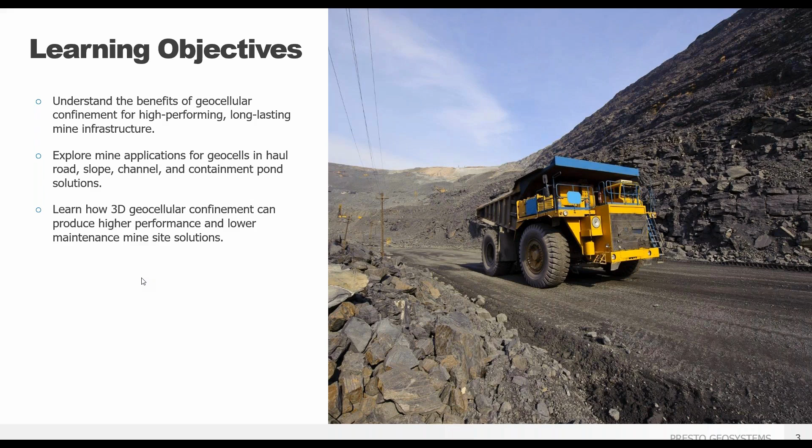The 3D GeoWeb cellular confinement system is perfect for mine industry solutions as it stabilizes unstable soils vertically and horizontally in the applications of load support, slope protection, channel armoring, and earth retention. Today's presentation will focus on permanent and economical solutions with the GeoWeb system for a number of challenges facing the mining industry.

Stabilization of soft soils for access to site and haul roads, controlling and containing rainwater, protection of geomembranes in basins, tailings, and leach pads, and reclamation of slopes at the closure of a mine. Through 3D confinement and by strengthening the fill, less material is required and waste rock can be used on site.

The GeoWeb system is our version of geocell technology and consists of two main attributes. The first is the cell size. The cells come in three diameters, small, medium, large, and varying cell depths. Cell sizes are selected following an evaluation of project-specific needs and site conditions.

The ultrasonically welded seam, where all the connecting points are, is very important to the function of a geocell. The stronger the seam strength, the better the performance of the geocell. Stronger seams allow for heavier infill material, steeper and taller slopes, and better lifetime performance. GeoWeb is produced for consistently strong welds at cell junctions while also maintaining semi-rigid ductile properties within the cell walls, high stress crack resistance, and overall toughness and long-term durability in the environment.

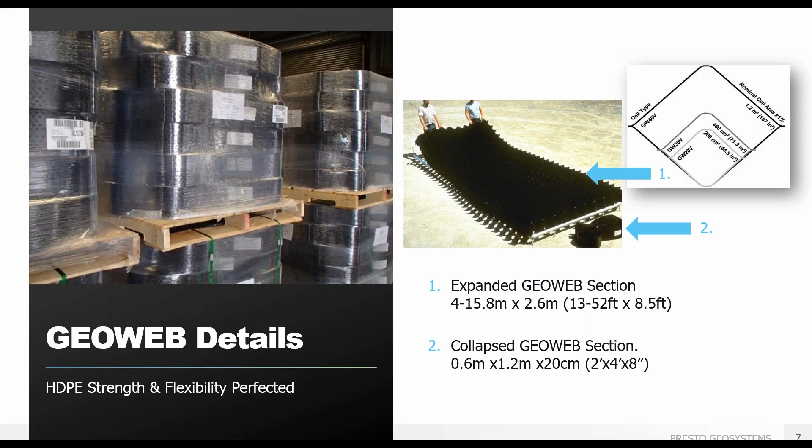Here we see the typical GeoWeb panel as it comes tri-folded on a pallet. GeoWeb is lightweight and requires no specialized equipment for installation. Sections flex like an accordion so they can follow natural contours of the worksite without being confined to a rigid set of dimensions. The infill, or what you put into a container, is the second important attribute of the GeoWeb system.

An important benefit of the system is that low-quality aggregates, sand, or on-site reclaimed material can be used to fill the geocells. Using reclaimed sand or aggregates can save a significant amount of money on materials and transportation costs. We can also remove fines if drainage is desired, as geocells provide the confinement and aid compaction of cohesionless soils. Without fines, we can significantly improve drainage and let water flow freely through the system, preventing pore pressure buildup and overall cross-section failure.

This ability to use low-quality sands and aggregates with friction angles in the 20-degree range really sets GeoWeb apart from geogrids and geotextiles. Those planar products require high-quality materials with higher friction angles to achieve their optimal performance. With GeoWeb, materials with low friction angles are fine, and GeoWeb panels reach their full potential even with these poor materials, which can provide significant cost savings. As a value engineering option, the GeoWeb system can reduce the cross-section required by half.

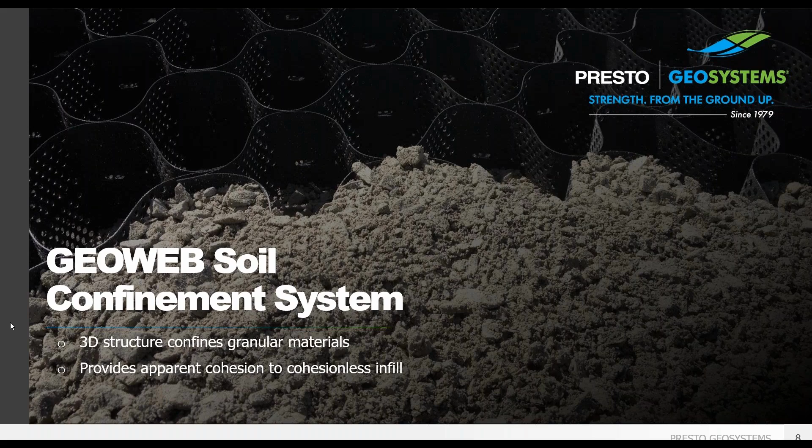The three primary elements of any geocell system, cell walls, internal junctions, and connectors, must perform uniformly as a complete system. Therefore, an incremental improvement in one of the characteristics, like cell wall stiffness or ESCR, is only valuable if a complementary improvement has been made in the other components of the system.

GeoWeb is manufactured using a proprietary blend of high-quality virgin high-density polyethylene, and our proprietary formulation has stood the test of time for more than 40 years, containing no fillers, unstable polymer combinations, or exotic alloys. For most typical sites, GeoWeb will retain its durability for greater than 100 years, with lab testing indicating 149 years without degradation, even at full exposure to the elements.

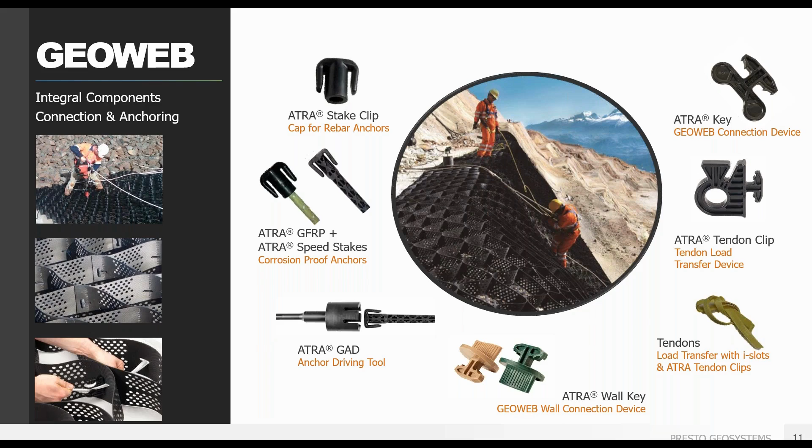Presto's GeoWeb system is equipped with numerous design and construction components that increase strength and speed of installation. Each of them with specific strength values so calculations and modeling replicate real-world forces, and the solution is designed for the project needs instead of as a commodity one-size-fits-all product.

The system components are all the supporting pieces that help the GeoWeb protect the road surface and subbase layers, as well as slopes and channels, and also ensure relatively uniform performance of this interconnected system, thereby protecting against the damaging effects of non-uniform deformation and differential settlement in response to applied loading. The components make it safer, faster, and easier for installation.

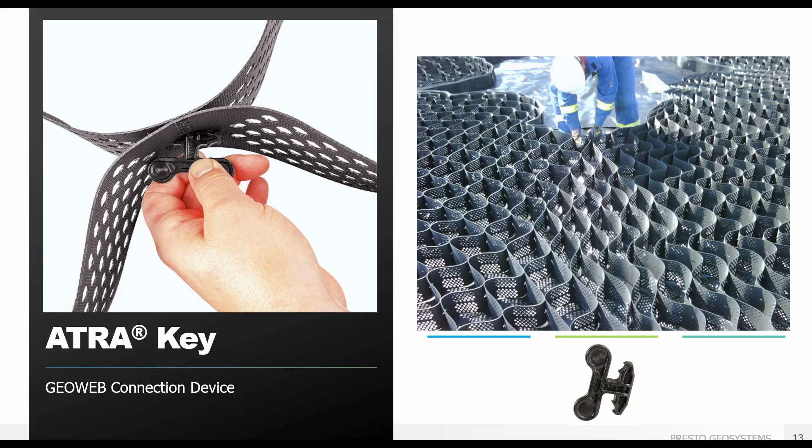The Atra key is the first component for a completely integrated system, connecting each individual panel of GeoWeb into a single web that covers the slope or the area. It allows for faster installation of the GeoWeb and will last the lifetime of a project, ensuring that the GeoWeb system will not fail under anticipated loads. It will also ensure the system holds up to loading over time without the corrosion seen in staples or the failure of underperforming cable tie or two-piece systems.

As slope angles increase, the driving force of the infill material exceeds the available frictional resisting force, and additional anchorage will be required. Atra anchors hold the GeoWeb to slope and penetrate into the ground. If corrosion resistance is required due to project conditions, Presto has an HDPE Atra speed stake designed to work with the GeoWeb and offer higher resistance to extraction than rebar or J-hooks.

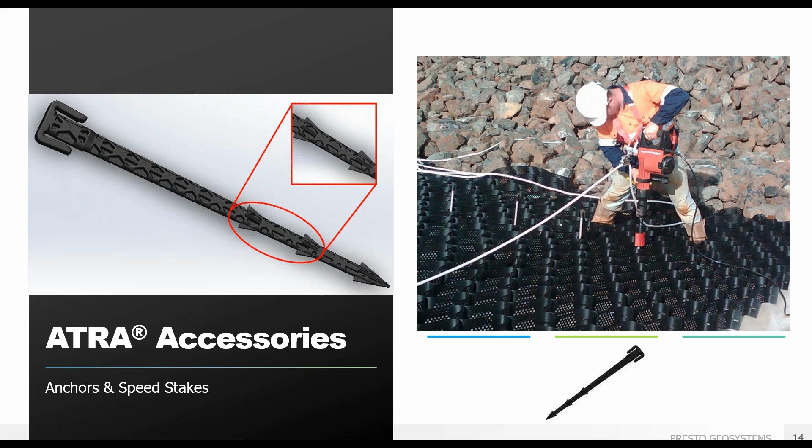For steep slopes, a slope where native soil is highly erodible, or over a surface that cannot be punctured, such as a liner, tendons can be used. The Atra tendon clips transfer the load from heavy infill material to the tendons and crest anchorage system. Only the Atra tendon clip is specifically designed to fully transfer safely and securely the forces placed upon the geocell.

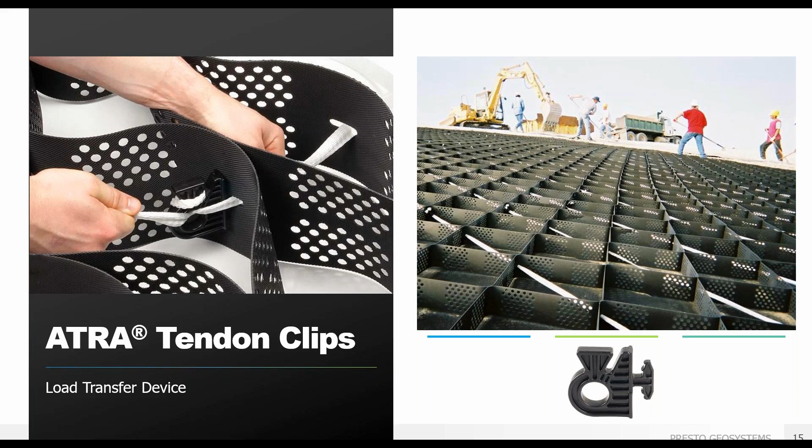Every accessory and every feature has been designed and tested to specifically work together, so we go from problem to design to construction solution with a system where modeling replicates those real-world forces. Now let's talk about how to take advantage of the benefits of geocellular confinement. The first application we'll highlight is load support.

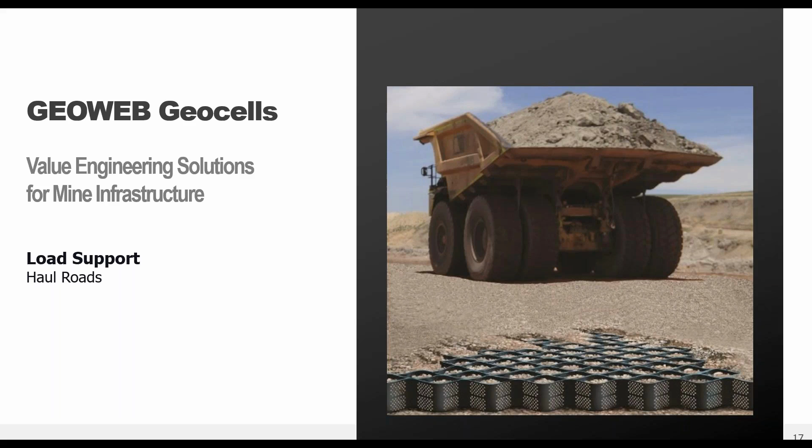The GeoWeb system stabilizes unstable soils vertically and horizontally, and in load support applications offers various benefits for mine clients. GeoWeb geocells were invented for supporting heavy loads over soft soils, the perfect solution for haul roads. Before giving specific examples with case studies, I'll explain how and why GeoWeb geocells work so well for load support.

Again, GeoWeb was invented for solving a military problem, how to cross beaches with heavy military equipment. The Army sought a quick-to-deploy road solution, and a Presto engineer, Gary Bach, collaborated with Steve Webster of the Waterways Experiment Station to weld strips of polyethylene and form the first geocells.

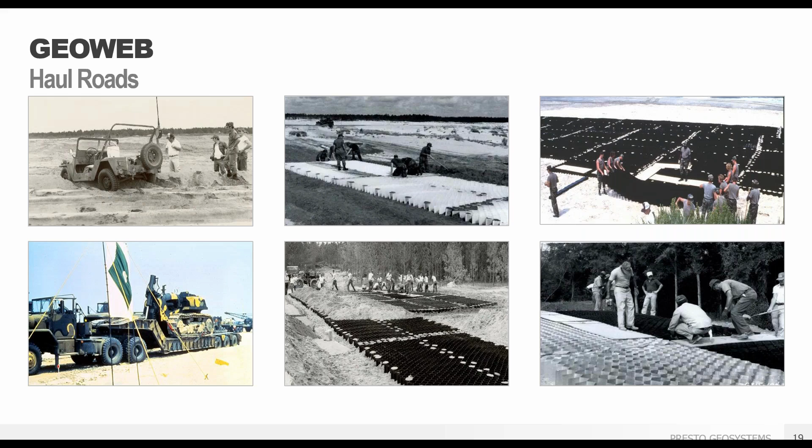The system evolved to include UV stabilization and other improvements, such as perforation, texturization, and connections, but the concept of geocellular confinement and the particular strength properties of high-density polyethylene have been proven over 4 decades of load support. Likewise with the use of low-quality and low-friction angle infills.

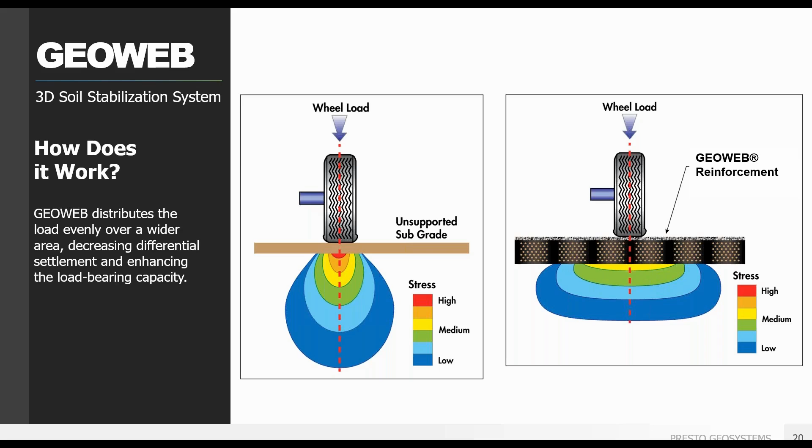Here we can see the stresses of a subgrade with an unsupported subgrade on the left and GeoWeb reinforcement on the right. Notice how there's a complete elimination of the highest stresses at the surface with GeoWeb reinforcement. The stresses are reduced and distributed over a wider area, which we call the mattress effect. This mattress effect reduces stress reaching the subgrade and leads to a significant decrease in deflection and rutting. Let's get a bit deeper into how that works.

GeoWeb geocells can alter the geometry of a soil pressure bulb beneath an applied load through the mattress effect. When a load is applied to a geocell reinforced layer, lateral earth pressures develop within the infill material, which is confined laterally by the geocell walls against movement, in turn developing upward shear resistance along wall interfaces throughout the interconnected network of cells. In essence, this lateral confinement converts horizontal earth pressures into upward resisting shear forces.

When combined with suitable base reinforcement, such as an enhanced woven geotextile, it becomes possible to construct over very weak subgrade materials, including those with standard penetration resistance values less than 2 blows per foot, which is a CBR less than 0.5%, where most planar geosynthetic products such as geogrids would otherwise fail.

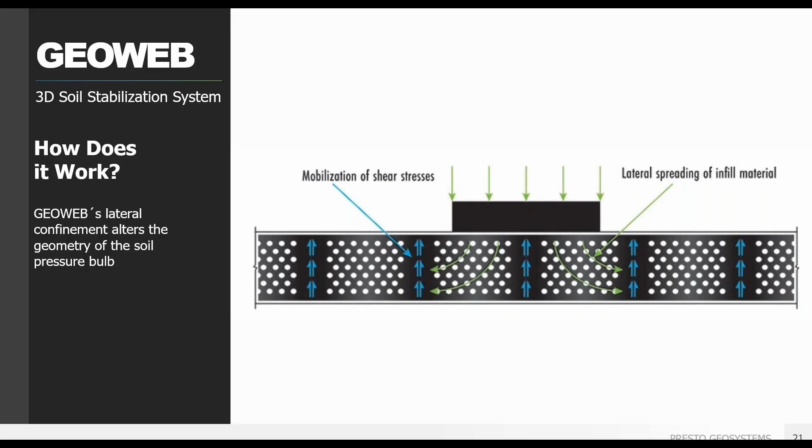The GeoWeb cell walls also transfer hoop stress, which is important in keeping the system intact and helps create that mattress effect. The strength of the seams around each cell, the material properties of the individual strips, and the connection method between panels are all important factors in determining how the GeoCell system can improve load-bearing capacity. Strong seams, semiductile resin properties, and integrated connectors are critical to a well-performing system. The GeoWeb system and accessories are specifically designed to work together to be an effective permanent solution for soft soil locations.

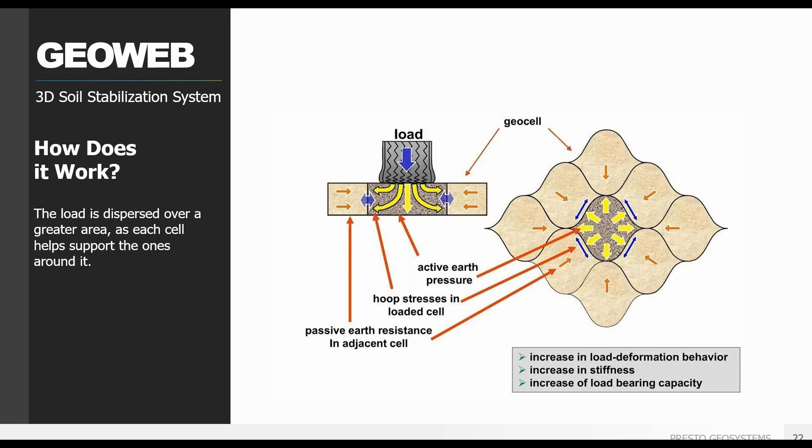In a load support scenario, vertical deformation can only occur with either compression or compaction of the soils, or through lateral movement of soil particles. And by spreading out the load in a classic granular fill approach, you can reduce the compaction of the near surface soils. But only with cellular confinement can you assure there's no lateral shifting of those particles, which is what leads to rutting. The mattress effect also reduces stress reaching the subgrade, and by eliminating that lateral particle movement, the GeoWeb system can stabilize the surface, eliminating your need for constant maintenance.

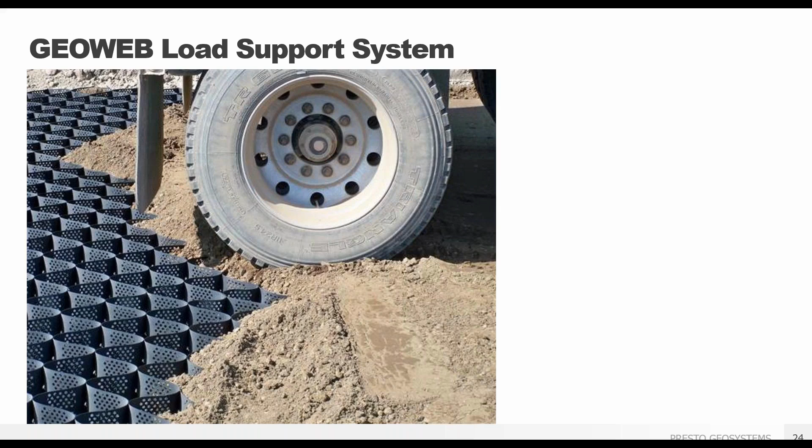Here we see some of those impressive load support benefits with AASHTO H25 loading on a partially filled GeoWeb panel over soft subgrades. We see how the cells push back against each other to support the load, and that only the adjacent cell needs to be filled for that support. A great benefit to using GeoWeb is you don't need to have every cell completely filled before the road is usable, so you can reduce construction time and materials with this approach.

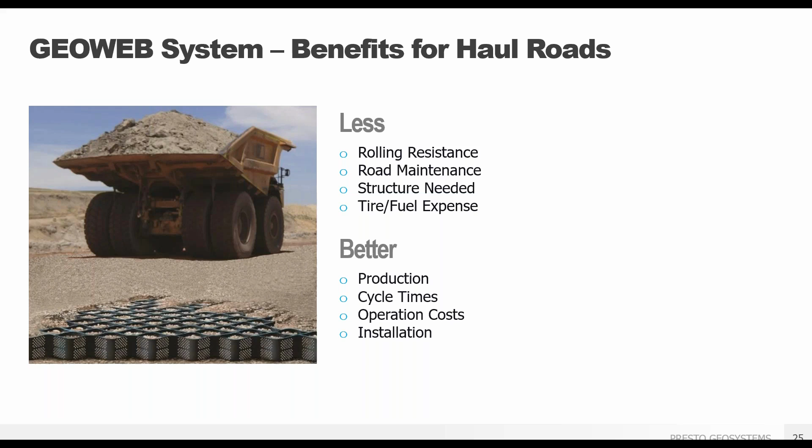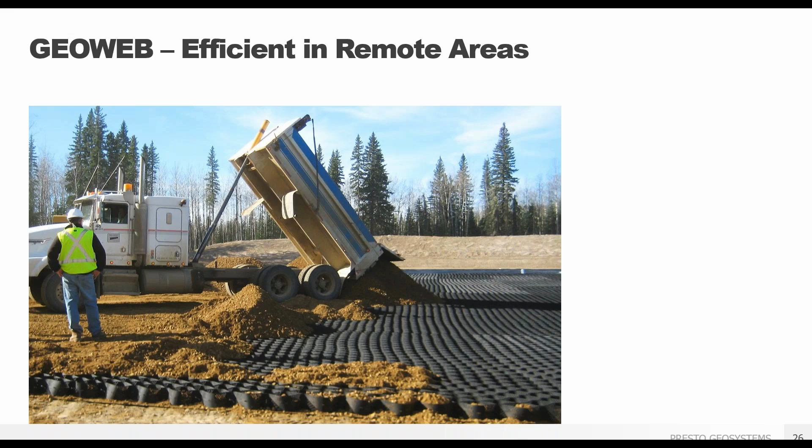GeoWeb provides a system with less rolling resistance, less required maintenance, less expenses needed for fuel, and less structure required to support your loads, all with better production, better cycle times, better operational costs, and better installation. A great value engineering solution for your site access and haul roads. The 3D structure functions well in remote areas where clean aggregate is scarce. Often at mine startup, that's also the case. The compact GeoWeb systems ship efficiently to job sites and require fewer trucks to transport materials.

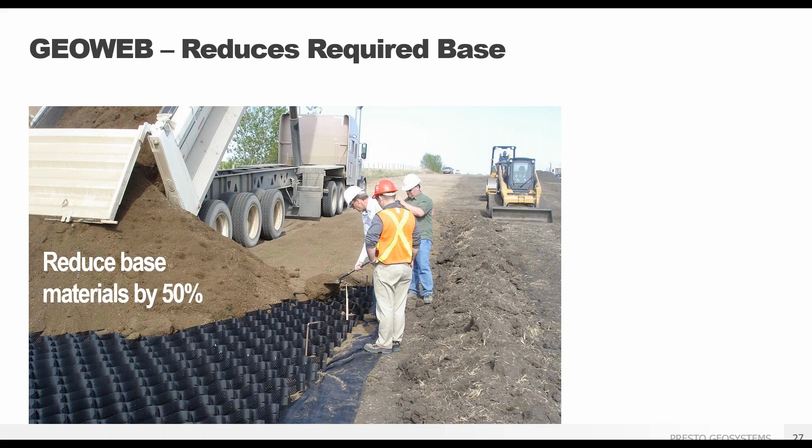On-site sand infill in this example is used, so costly aggregates won't be necessary. Nearly any locally available granular fill, sand, or even waste rock could serve for the GeoWeb geocells in your projects. In the majority of cases, the GeoWeb system can reduce your cross-section depth by about 50%. GeoWeb allows stabilization with a reduced cross-section, ideal for underground haul roads. Let's look at a haul road example as a case study. Our case study for haul roads is for a mine site in South America and a great example of the power of geocells as a value engineering solution.

GeoWeb geocells were incorporated into the design of a haul road at an active mine in Suriname, with heavy loading over soft subgrade and local scarcity of quality angular aggregates, as this was near their mine startup time. The prepared subgrade strength exhibited a California bearing ratio value of about 2.5%, consisting of saprolite and clay, with anticipated loading including CAT 785 haul trucks, so 275-ton vehicles, and a haul road useful design life of 10 years at 250 movements per day. GeoCells offered a value engineering design option with multiple benefits.

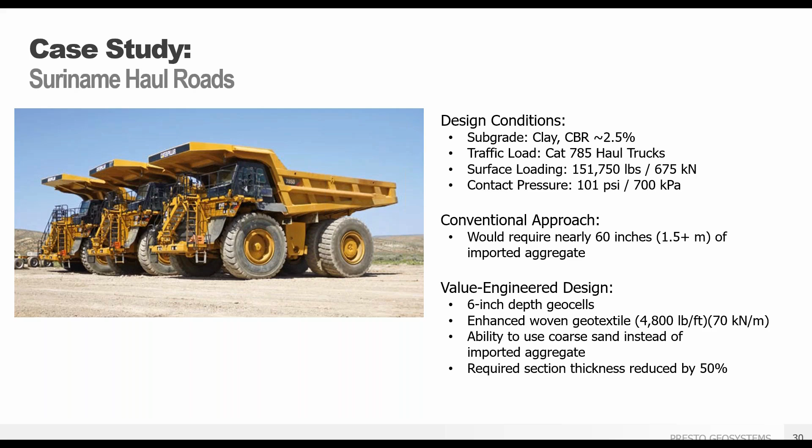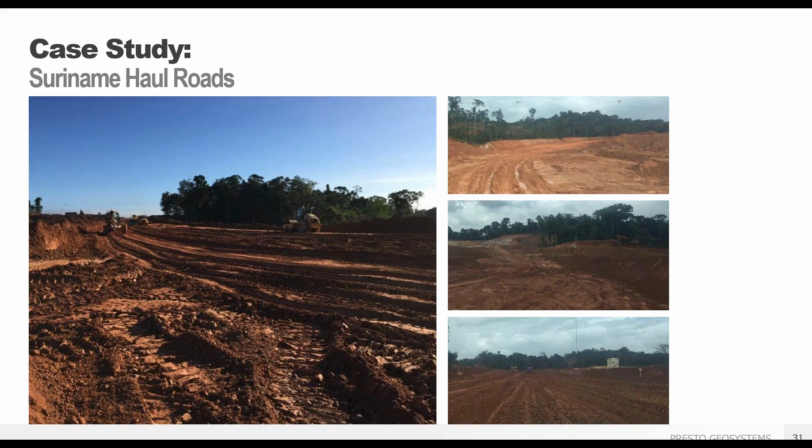The sticky clay soils made the road impassable with every hard rain, and adequate aggregate materials for a standard construction solution were not found anywhere nearby. GeoWeb GeoCells offered a great value engineering option with just one layer of 6-inch or 15-centimeter geocells, being able to support the heavy haul truck loading over soft subgrades and reduce the total thickness to 30 inches from the 60 inches suggested by standard design guidelines. GeoCells dramatically increase the shear resistance of the infill, which allows the use of lower quality fill to carry concentrated loads that would otherwise require crushed aggregate to prevent localized near surface shear failure.

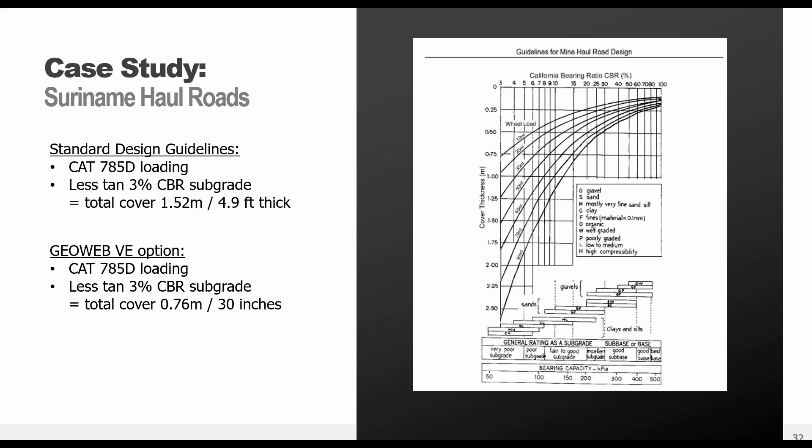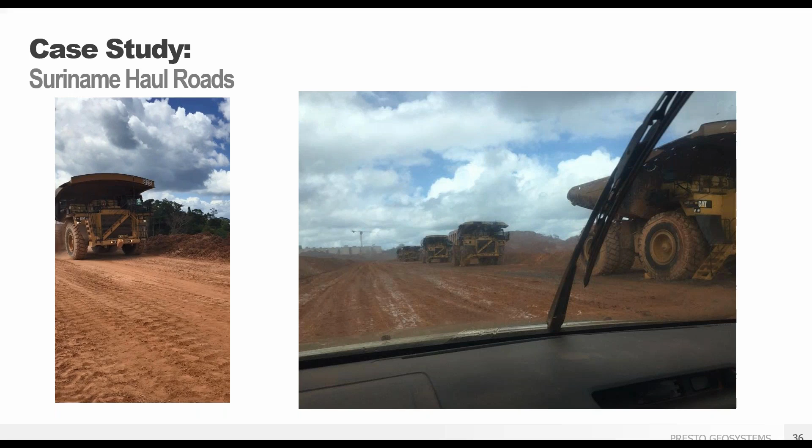Even with hard tropical rains. The results of the GeoWeb installation offered notable benefits: a great reduction in the total cross-section needed, reducing it by 35% with coarse sand wear surface and by 50% with an aggregate wear surface. The estimated savings per kilometer are around $150,000 US. That's about $100,000 per mile in savings.

Since installation, there's been a reduction in road maintenance costs of over 65%. There are no downtimes due to rains, and there have not been any deep ruts observed since installation, multiple years now. There's less vehicle maintenance and less fuel required, better productivity and operational costs, safer site conditions, and the expansion opened before the scheduled date and under budget. All in all, a very satisfied client.

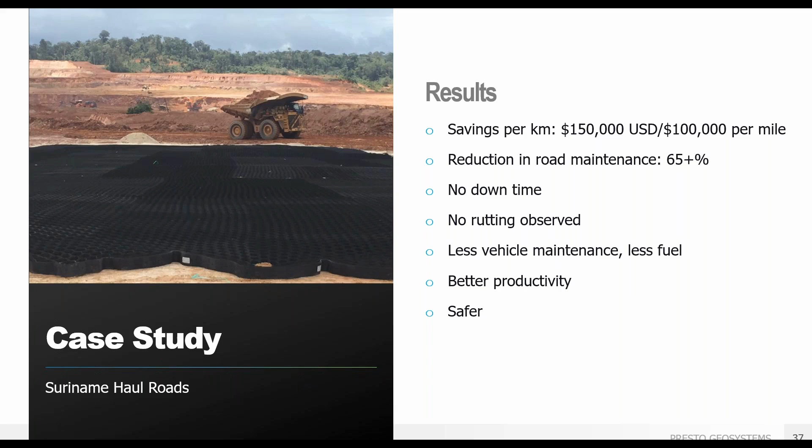Project calculations included an analysis of bearing capacity improvement to evaluate the combined benefits of lateral confinement from the geocells in conjunction with the tension membrane effect of the underlying high-strength woven geotextile to confirm the proposed approach would meet design requirements. The analysis indicated the stabilized section would offer a substantial increase in the allowable bearing capacity over existing subgrade, without which it would only have an allowable bearing capacity of around 20 to 30 psi at best.

An analysis of hoop stresses under working loads was also performed to verify the geocell system components would be able to withstand the demanding load requirements. Hoop stresses were compared to the ultimate tensile strength of the perforated cell wall, as well as the strengths of the internal and mechanical junctions.

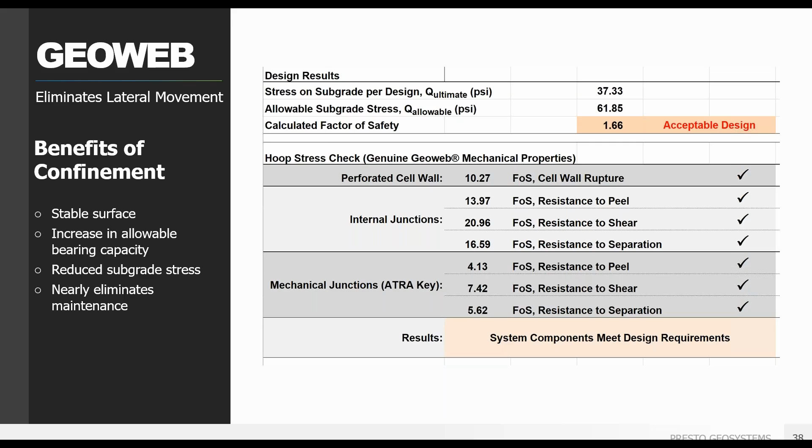In the case of the junctions, ultimate strengths for all three primary modes of potential junction failure, shear, peel, and separation or splitting, were compared to the fully developed hoop stress under working loads to calculate factors of safety for each mode. For cell wall, the factor of safety against cell wall rupture was calculated. As shown, all the system components were verified to meet design requirements.

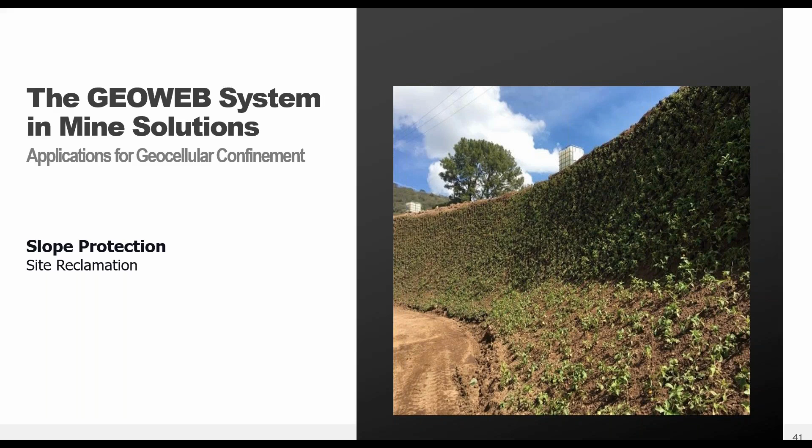Our next application for GeoWeb will be slope protection. The GeoWeb system stabilizes unstable soils, and in slope protection applications, that means we can control erosion while at the same time sustaining vegetation with steep slope angles. The GeoWeb system allows flexibility in a mine slope reclamation solution. And the GeoWeb system allows vegetation of tall, steep slopes, very steep slopes.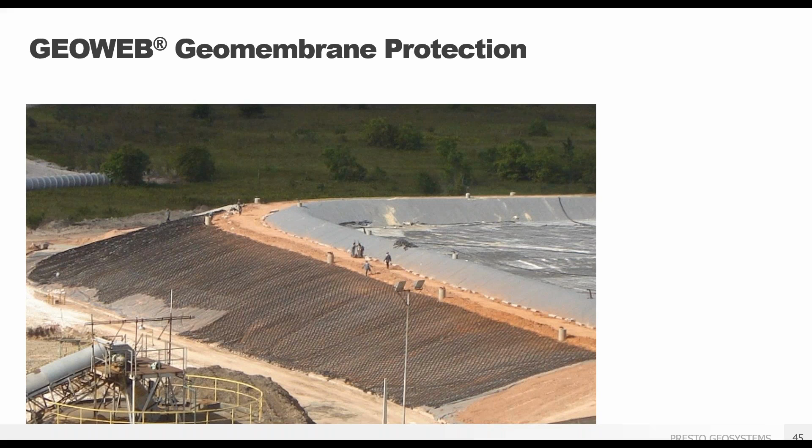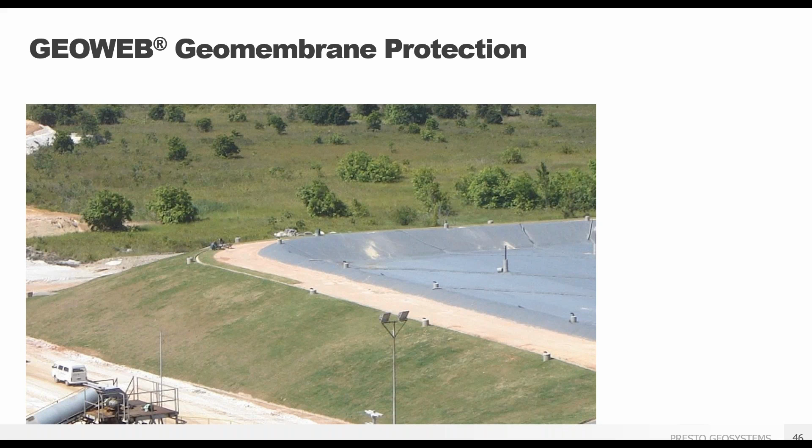GeoWeb also allows you to suspend a protective layer to vegetate or hard armor over geomembranes without the need to perforate the liner for anchors. And again, as you see here, able to sustain vegetation and control erosion in that protective layer. Here we have another example of the GeoWeb system with tendons over a geomembrane.

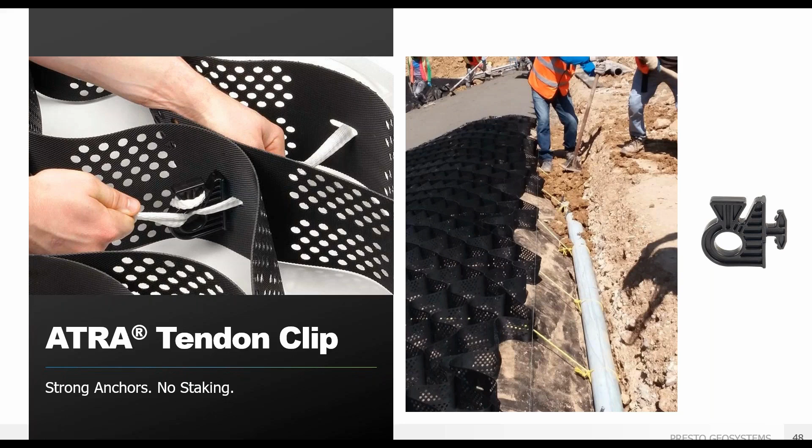The anchor system with ATRA tendon clips allows for a safe and strong installation without the need for anchor stakes or perforation. The ATRA tendon clips transfer loads from the geocell to the tendon and the tendon to crest anchorage. Here you see an example of that crest anchorage, a buried dead man.

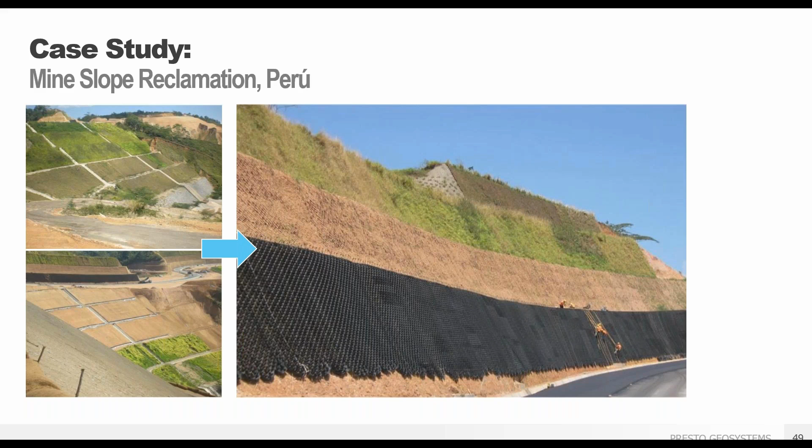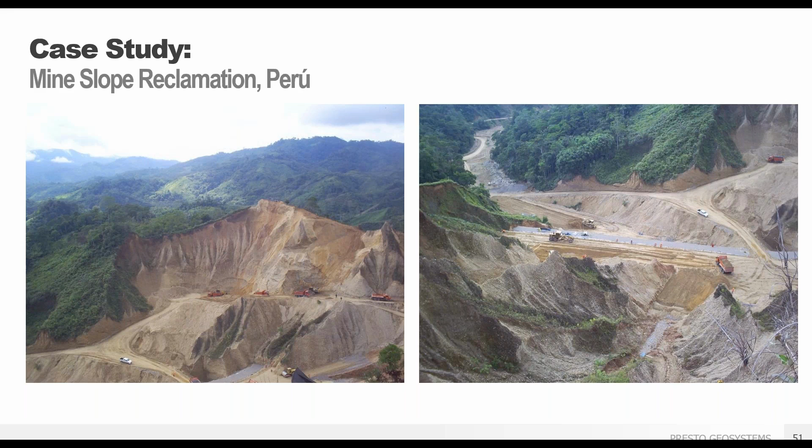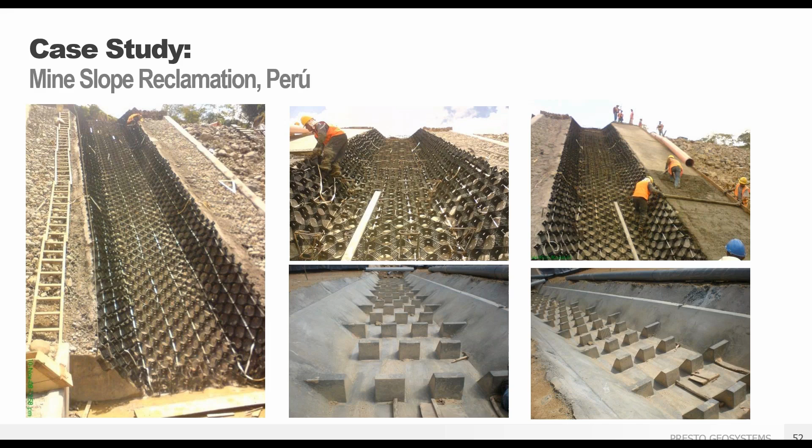This case study is for a mine slope reclamation in Peru, with, as you see, some very steep slopes. The slopes and cut slopes had angles greater than 70 degrees, and as you see here, with much erosion. So a complete and complex solution was required, including the design and construction of integral rainwater channels with energy dissipators, all with the goal of managing stormwater and preventing slope erosion with little to no maintenance, as this was part of the mine slope reclamation in a closure phase.

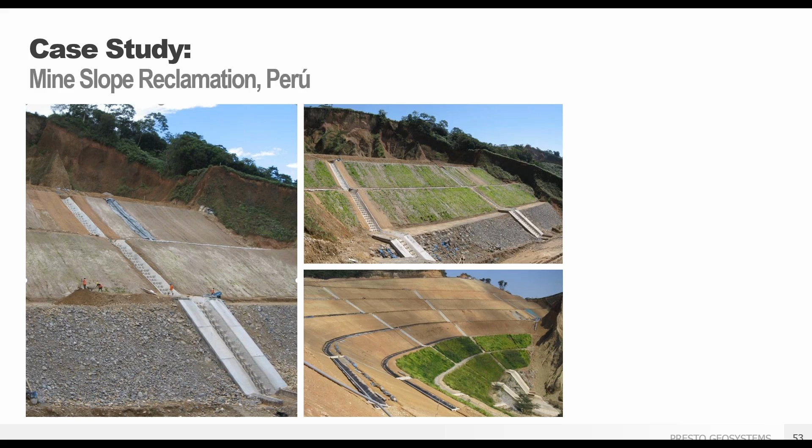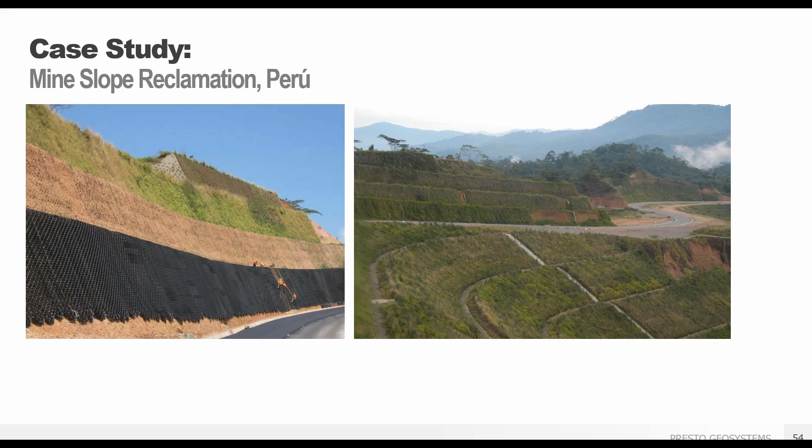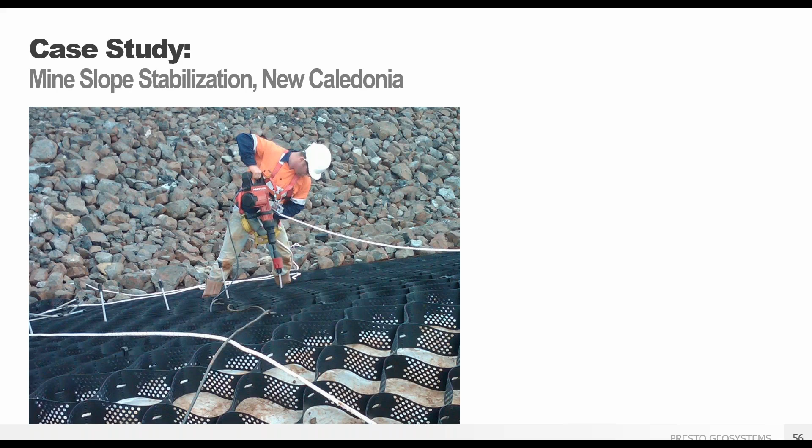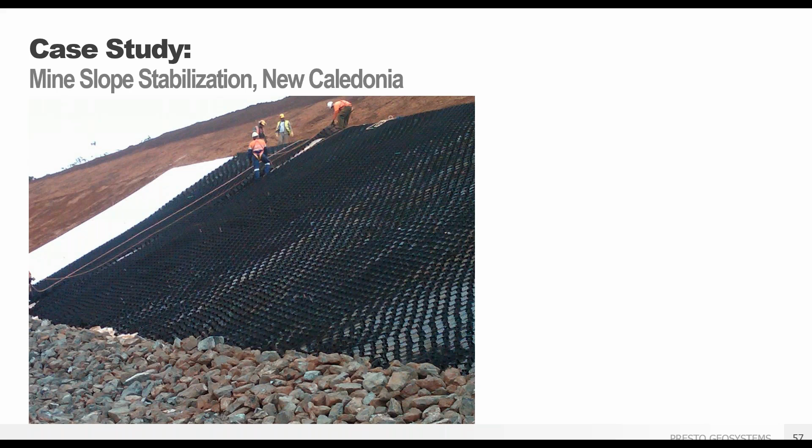The slope protection system included a staked GeoWeb slope using ATRA anchors, and the system has to stand up to extreme weather events, including cyclones with heavy rains, like 600 millimeters or 24 inches in 24 hours, and also strong earthquakes of magnitude 7 in the region. All this with 45-degree slopes. And here we see the infill placed using on-site waste rock from the mine, stabilized with GeoWeb geocells.

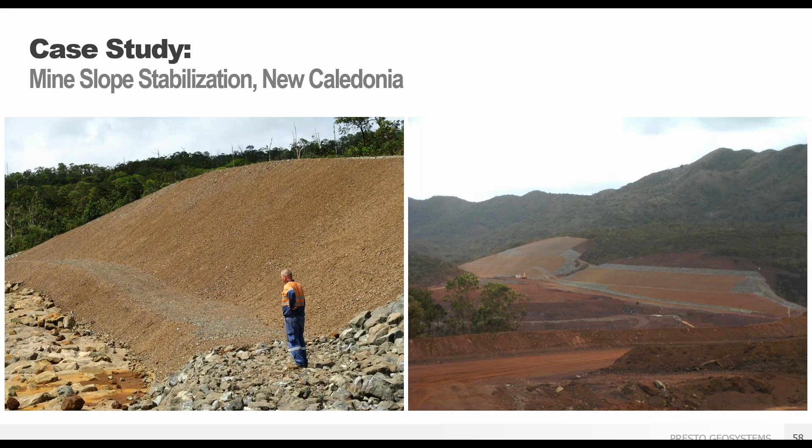And I want to stress that when I say channel, I'm talking about protecting an area that can be the full width of the channel plus the side slopes. It can be just the bottom pane of the channel, or even just one or both side slopes like an embankment or dam structure. Full flexibility here for where you want to protect.

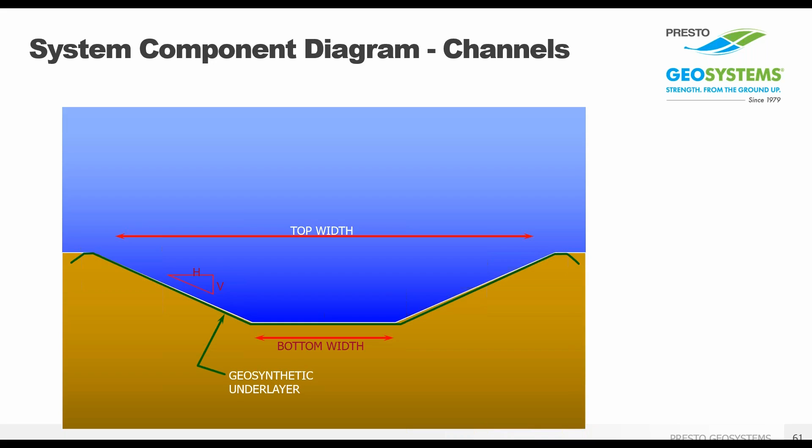The process for building up a channel protection goes something like this. To begin, we have our channel with standard dimensions and side slopes. Depending on the infill, a geotextile separation layer may be required. Then the GeoWeb panels are put in place. Note how the panels typically have crest anchorage at the top of the side slopes, as well as a horizontal turn. This is important for anchorage, but also to prevent water from flowing under the panels.

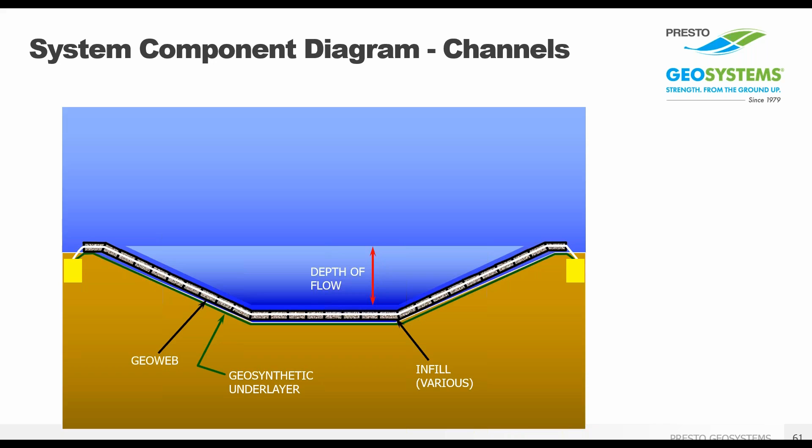We have two options for anchoring. First is using ATRA anchors or ATRA speed stakes. These are placed along the face of the channel and at the crest. The second is to use tendons and a crest anchorage. So all the anchorage is at the crest and the side slopes or embankment, not along the channel face. The cells are then filled with desired infill material, and the GeoWeb system is designed to create a stable channel surface even when maximum flow velocities and shear stresses occur.

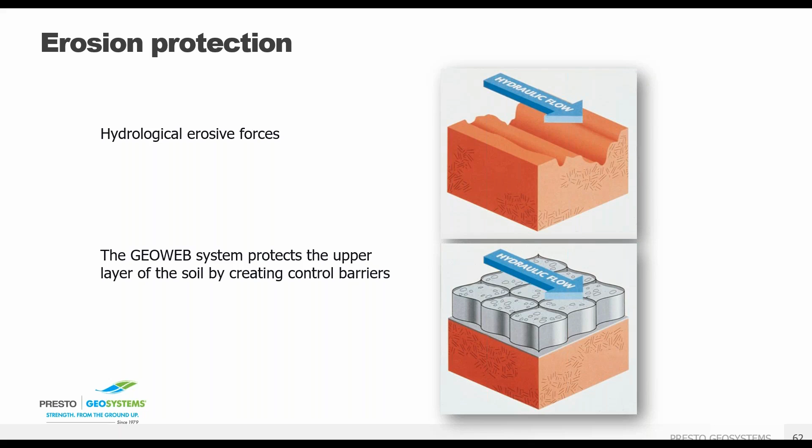The use of the 3D GeoWeb channel protection system is much more effective than two-dimensional solutions that are subject to scour. The fill material is confined within each flexible cell and protected against erosive forces, making the entire channel or embankment more stable. Two-dimensional solutions such as erosion control blankets or cementitious blankets do not protect the channel from the hydraulic forces of the water, so the channel can fail even with these 2D protection systems in place that are also prone to uplift.

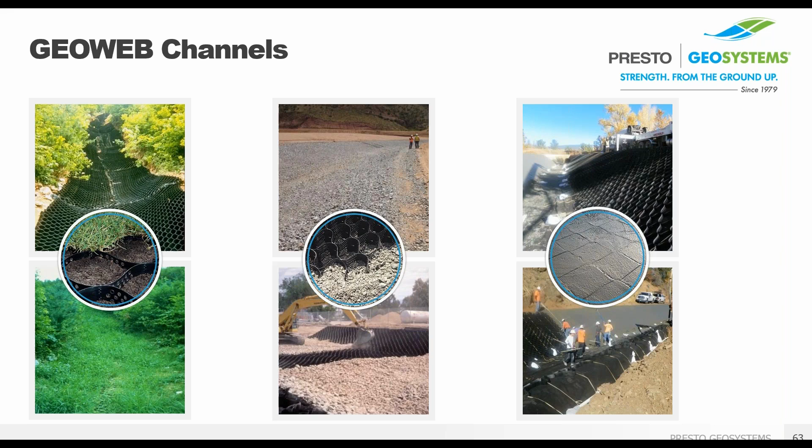The GeoWeb channel system provides protection with a variety of anchorage and infill options to best suit your project needs. Here we see channels with vegetated infill, aggregates, and concrete. Cellular confinement improves the hydraulic performance of conventional channel protection materials. Presto has done extensive testing with the hydraulics lab at Colorado State University, and their lab has a static drop of over 80 meters or about 260 feet for nearly limitless flows through their lab flumes.

The CSU test gave us formulas to calculate solutions for flows in vegetated GeoWeb channels up to about 9 meters per second or 30 feet per second. In aggregate channels, reducing rock size by 2 to 10 times compared to riprap or the Abt and Johnson or U.S. Army Corps of Engineers methods, and in concrete channels with flows of more than 11 meters per second or over 36 feet per second, with the GeoWeb system surpassing the flow limits of the lab flumes.

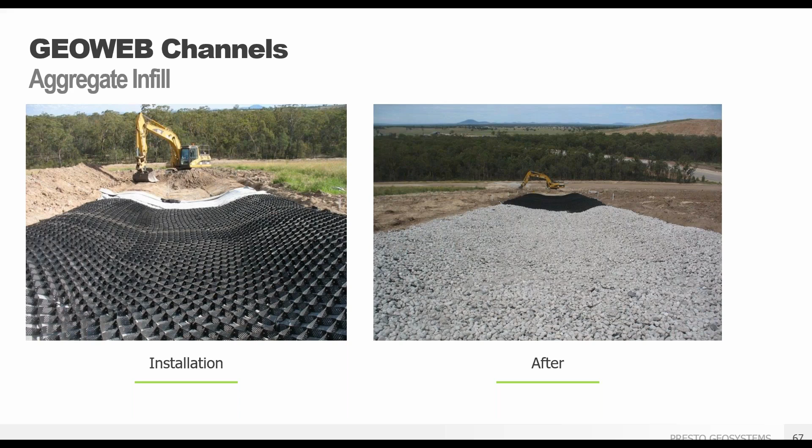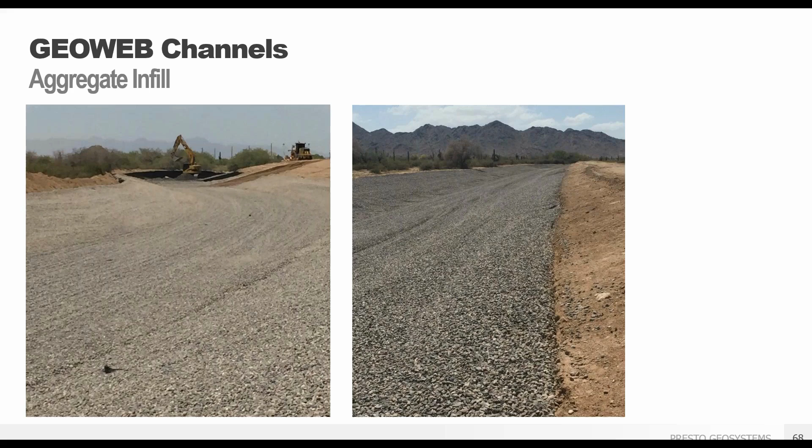Vegetated channels are not typical solutions for mine installations, and aggregate channels are often used for mild slope installations like this example of an outfall channel for Rio Tinto. Or this example with shallow embankments in Arizona. The GeoWeb channel infill can be waste rock, what's readily available on site, and less costly than importing fill.

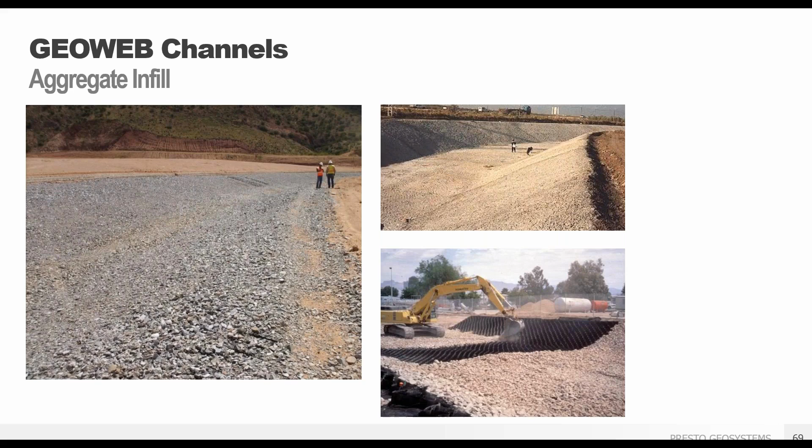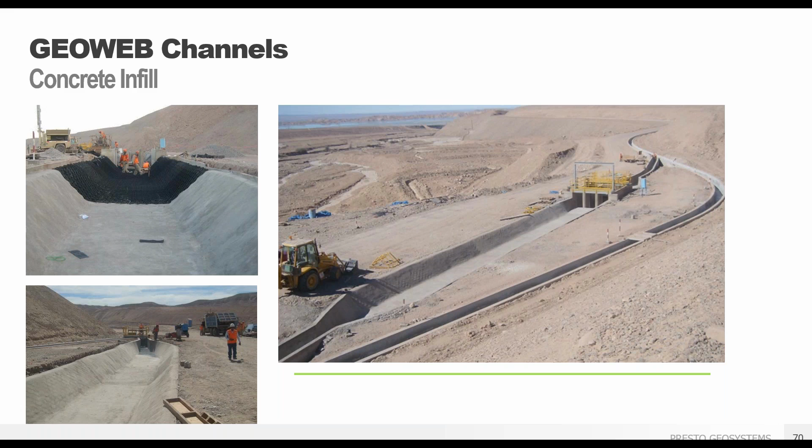For extreme flows and a permanent worry-free solution, concrete infill is recommended, as used in this spillway project in Peru. As well as in these remote site installations for San Andreas and Tyrone. There are many concrete GeoWeb channels at the Yanacocha mine.

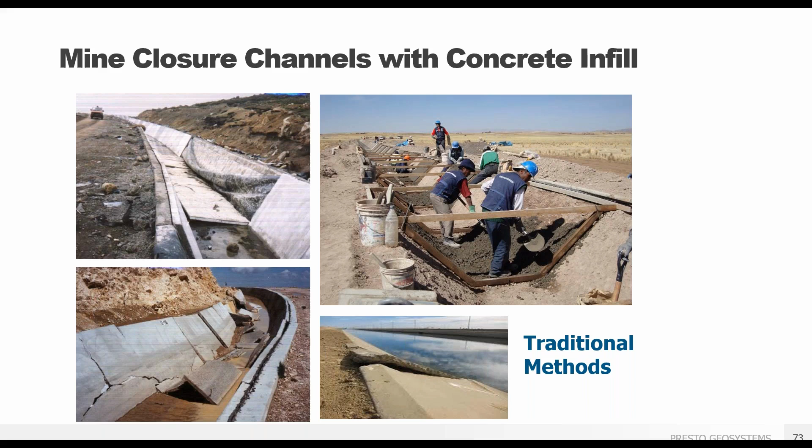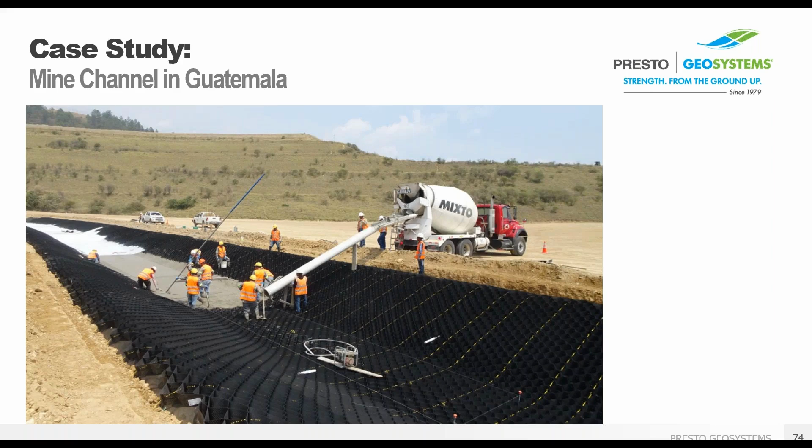And traditional methods often open the possibility to failure points, in addition to longer construction times. If your mine site has differential settlement expected or seismic activity along the channel, an inflexible solution like these traditional methods should not be chosen. We're going to look at a case study for a high-flow mine channel in Guatemala. GeoWeb allowed for a resilient and fully armored, seamless channel without the need for expansion joints and the potential failure zones seen with traditional poured channels, all with a reduced cross-section.

GeoWeb geocells can be incorporated to handle high-flow stormwater in remote locations, and their long-term resiliency makes them ideal for mine closure applications where environmental restrictions hold sites to consistent and permanent high performance, yet site access often allows only for occasional monitoring post-closure.

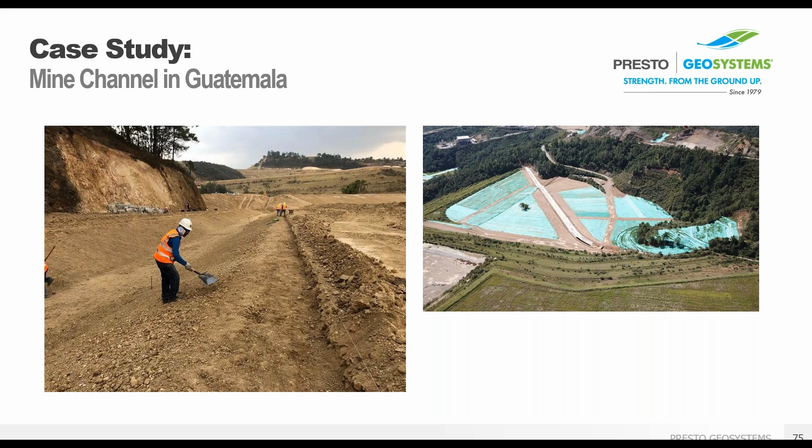Extended durability standards are especially important with increased frequency of record storm events, and if either seismic activity or differential settlement is expected. As our case study will discuss, this mine site in Guatemala experienced record storm events and strong seismic activity, and the geosynthetically enhanced channel armoring delivered consistent performance that stood up to the challenge.

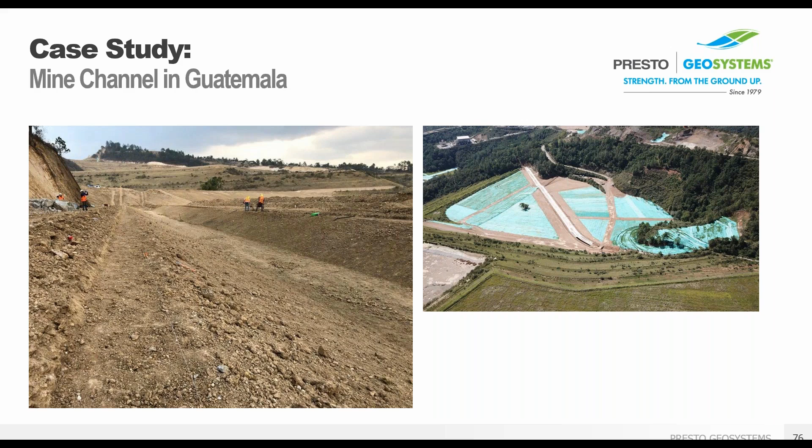Here are the design conditions and key components. The channel had anticipated hydraulic flow of 425 cubic feet per second, about 12 cubic meters per second. There were rapids included in the channel, and the client wanted to allow for excavator entry as needed for future cleanout. The mine site was originally considering an 8-inch or 20 centimeter reinforced poured concrete channel and looked to optimize design while maintaining a trapezoidal channel formation.

Presto's design calculations supported a 4-inch or 10 centimeter geocell system to allow that excavator support, but the mine preferred a 6-inch depth for additional factor of safety. This was still 2 inches thinner than originally budgeted, so already offered considerable savings in concrete costs. The design included a non-woven geotextile as a separation layer, 6-inch geocells with polypropylene tendons and a load transfer system, and 4,000 psi concrete.

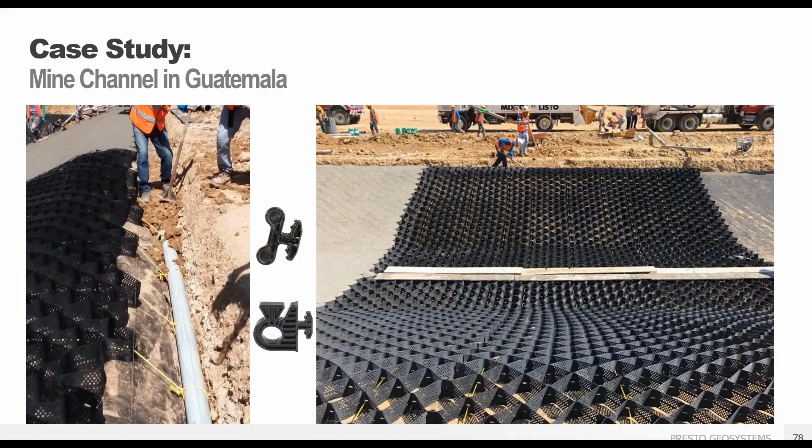The GeoWeb channel protection design incorporated our strong polypropylene tendons, ATRA key connectors, and ATRA tendon clip load transfer devices. First, the channel bottom was filled, then the side slopes working from top to bottom of slope. Note the yellow tendons and the deadman anchorage at the crest, as well as that horizontal turn at the crest that I talked about earlier. These anchorage components are determined project by project based on the details of your specific channel needs.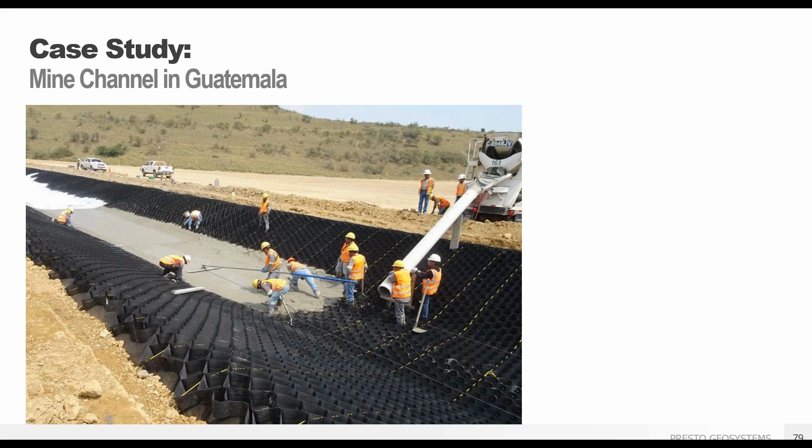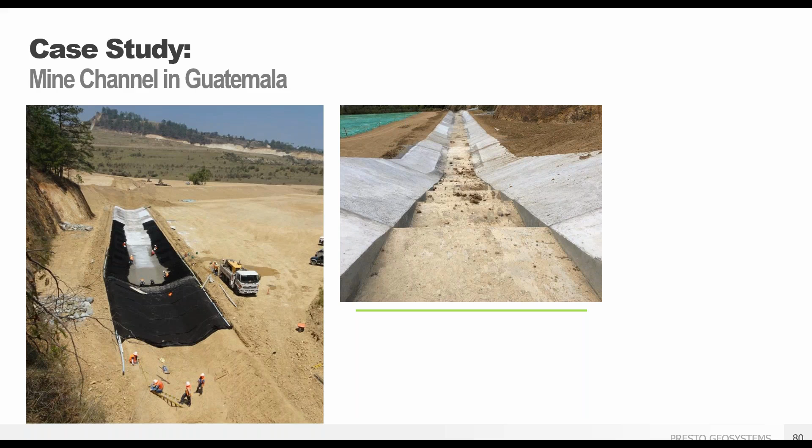Some step drop rapids were incorporated into this part of the channel design, with the GeoWeb geocells transitioning seamlessly into that structure. And here we see joining the rapids with the rest of the GeoWeb channel. And here's a drone view of the GeoWeb channel installation with the rapids here.

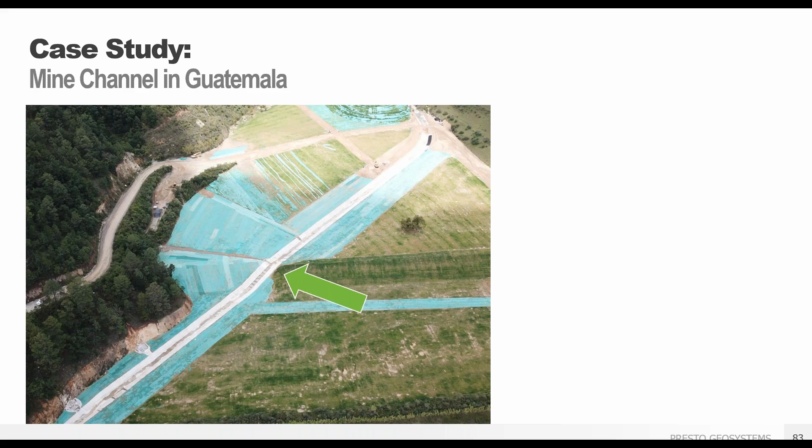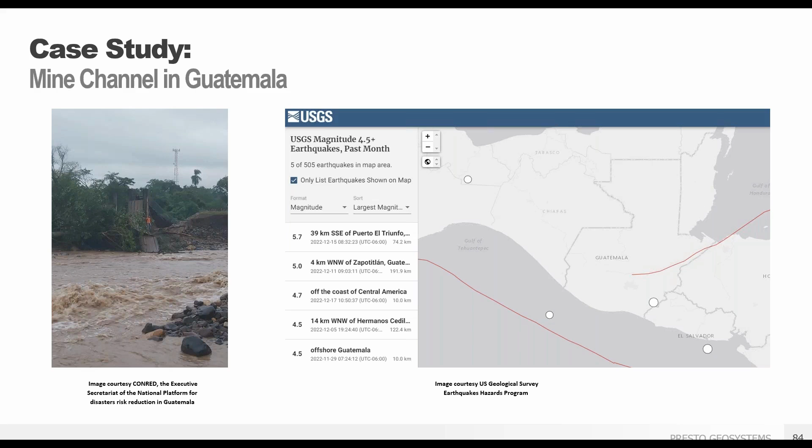The GeoWeb channel protection system allowed for a resilient and fully armored seamless channel without the need for expansion joints and the potential failure zones seen with traditional poured channels. The channel is now in its 4th year of performance without incident, even with record storm events and strong seismic activity in the area, with soil saturation, overflowing rivers, and landslides.

Geocells with concrete infill have the long-term resilience and economy to be considered a best practice and are considered among the solutions with the highest long-term performance results from the U.S. Bureau of Reclamation's 10-year canal lining study. Here we see a comparison of allowable velocities and shear stresses for various channel lining alternatives from the U.S. Department of Agriculture.

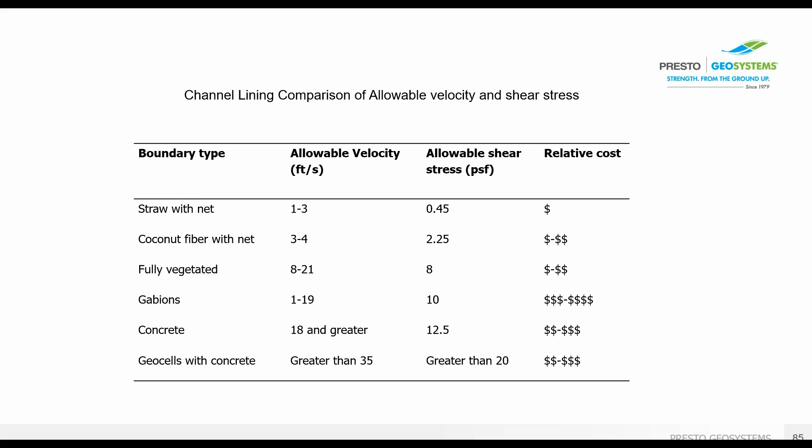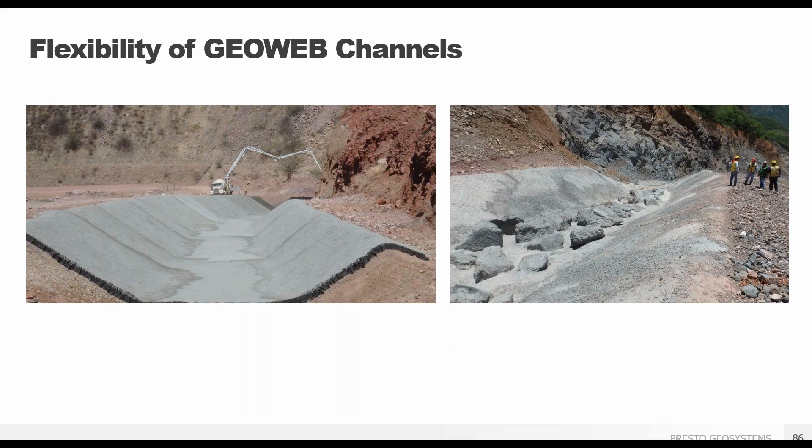The GeoWeb system provides protection and flexibility, as shown in this mine closure channel in Mexico, using big riprap fixed in place with grout in a rockfall area. Or in these rapids in a Peruvian mine installation. All with various options for anchorage and installation, and various options for infill. All in all, a complete channel protection system for your project needs.

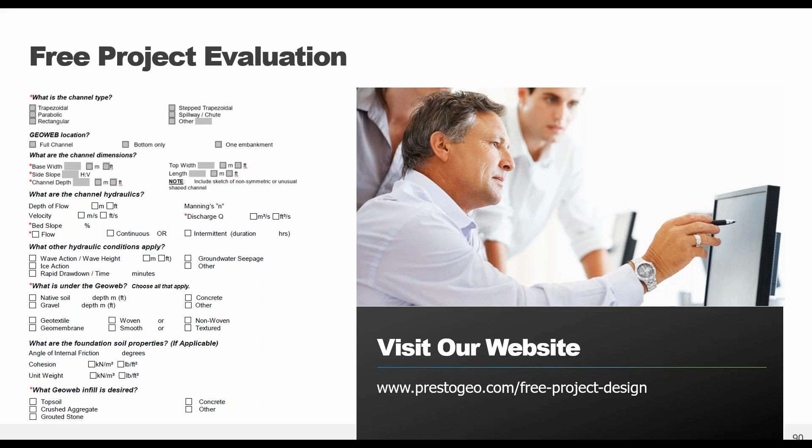Our final application today will be earth retention systems. The GeoWeb earth retention system can offer global stability and support of surcharges, even with seismic activity and differential settlement. Retaining walls serve to contain soils and protect utilities or storage tanks, while offering global stability for very steep slopes, like this example in Central America.

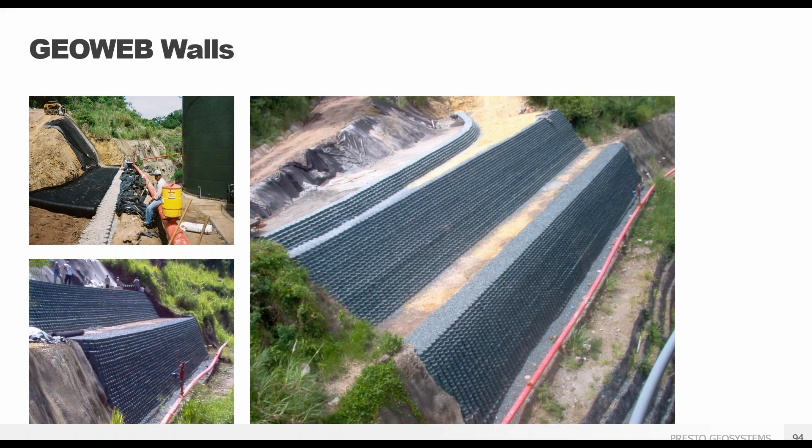GeoWeb walls also function as containment dikes with or without vegetation, and unlike block walls, GeoWeb walls can withstand reasonable differential settlement, hydrostatic pressure, and seismic conditions.

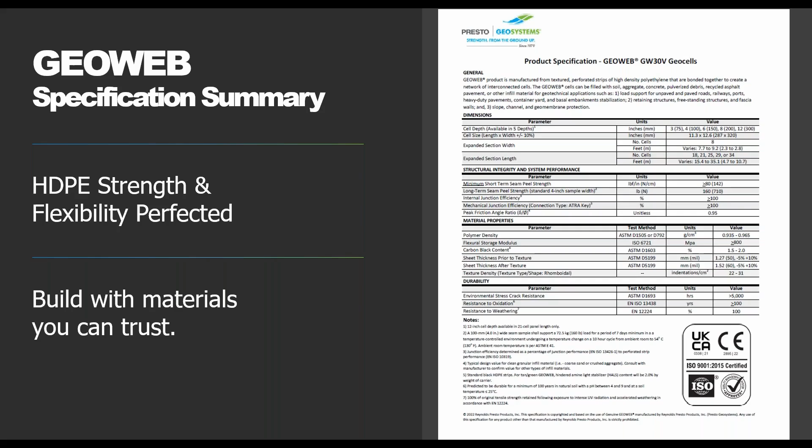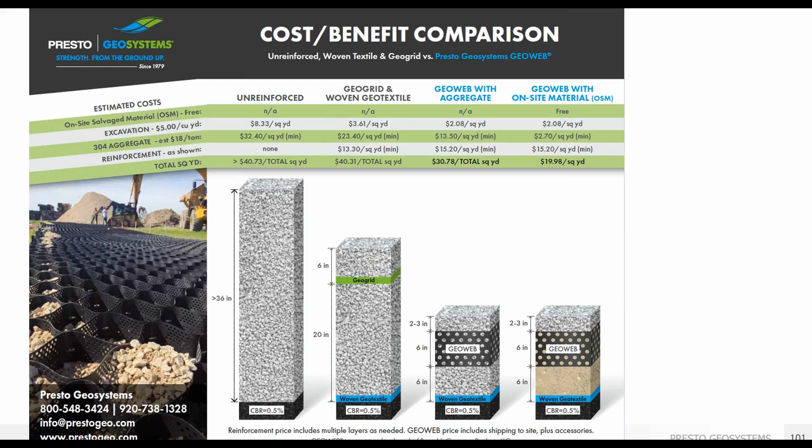Of course, your aggregate costs, distance to quarry, etc. might vary, but this will give a general idea of the savings that can be achieved. Again, we're happy to run a value engineering design for you so that you can compare to other solutions accordingly.